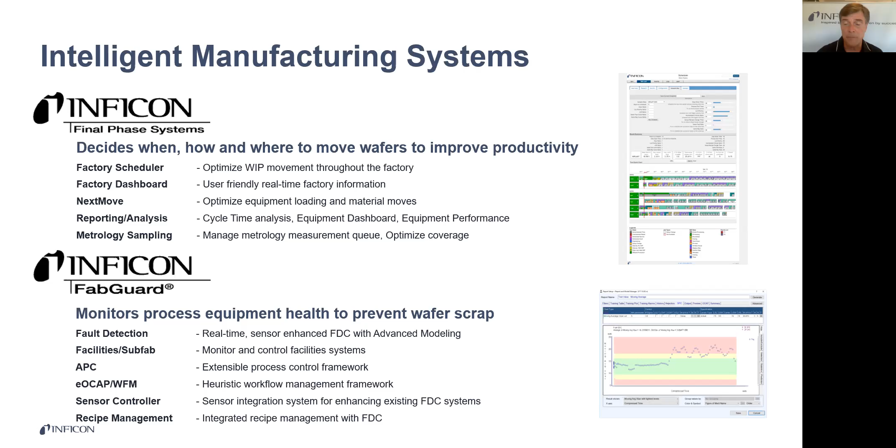INFICON's global presence is reasonable. We're a mid-sized company. We have 1,244 employees. But the most important thing is that we are where semi is. So we're in North America, we're in Europe, and we're in Asia. And there is somebody, boots on the ground, very close to you at all times. And we're very excited about our emphasis in the last 18 months on really increasing our expertise and our centers of excellence in Southeast Asia and in Europe.

Now, pivoting away from who is INFICON, and first of all, I hope you already knew us, I want to talk a little bit: what is all this smart and Industry 4.0 stuff anyways? So, first of all, smart manufacturing is largely the North American, more Asian definition of the same thing as Europe's term Industry 4.0. So the two terms are used very interchangeably now. They came about the same time, but out of two different think tanks relative to the same phenomena. And so I'm going to use those interchangeably.

I tend to use smart more because I'm in North America, and SEMI has used the term smart, and I'm involved with them. But the reality is that consulting groups on both continents came up with roughly the same concept. And so effectively, the first industrial revolution was literally the weave, in 1784, the mechanical weaving loom. So ironically it was almost exactly 100 years later until the first assembly line in 1870. And once again, almost exactly 100 years later for the first PLC, or programmable logic controller.

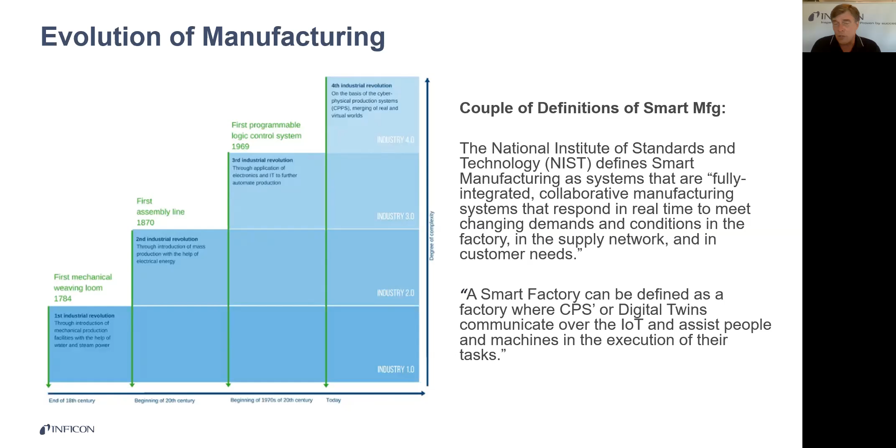Another definition, which I do want to talk a little bit about, is a more recent one that Deloitte put out, another great consulting firm that's working heavily in this space. I'm not going to read the whole thing, but the underlying part is they say smart factories are flexible systems that can self-optimize performance across a broader network of factories, suppliers, and partners, self-adapt to and learn from new conditions in near to real time, and autonomously run entire production processes.

Now, I purposely underlined across a broader network of factory suppliers and partners. I don't want to argue with who wrote this from Deloitte, but my perspective is that's the end state vision. So certainly, eventually, we want to have everything connected from raw material start to system shipped in a box to your end client. Today, we're not there.

And certainly, we use the term smart manufacturing really to refer to any physical operation of which you want to create a digital twin and have the ability to virtually replicate and emulate. And so that's an important distinction, because some people get hung up with, well, we can't do this yet because we don't have the protocol to speak to all 16 of my different factories, or I need this new communication methodology, or I need a new security system. Maybe true for the end vision, not true for just making your particular factory smart.

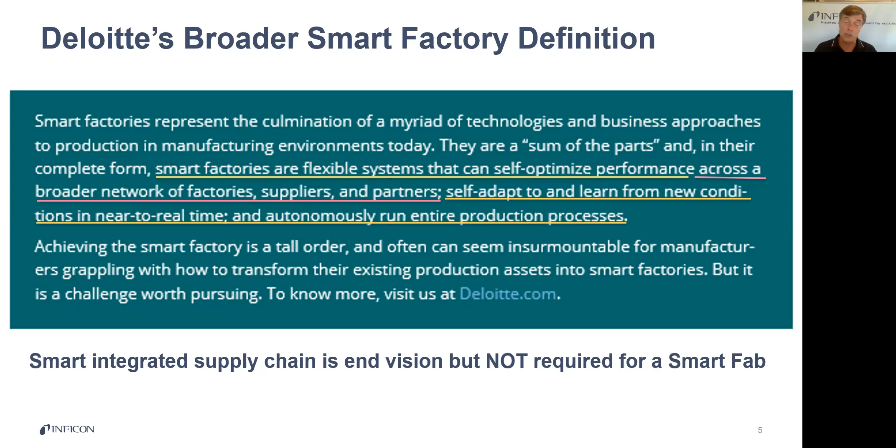Super important point. I'm going to spend a minute on cyber-physical systems and digital twins because they're so critical. People really don't use CPS much, a little bit in Europe still, but CPS was a big word under the Industry 4.0 terminology, where it's a cyber-physical system that they abbreviate CPS. Really, people have just gone to the digital twin, I think, because it's easier to say. I don't know. But they're the same thing.

It's really the situation where you have aggregated and computational elements that have the ability to sense, control, understand the physical and engineering systems, and they're all monitored. All operations are monitored, controlled, coordinated, and integrated to be able to make real-time adjustments with perturbations that are planned or unplanned. Tool goes down, it wasn't supposed to go down. Automatically adjusts, makes the best possible adjustments. Power is lost. What is happening? All of the kinds of things that normally would take human beings, and quite frankly, pretty skilled human beings, should be able to be handled by this digital twin or CPS.

And so it's really critical to understand that it's really a lot of communications, a lot of computation, and a lot of control. Ironically, it was really us in the semiconductor industry, by so dramatically lowering the cost of memory and lowering the cost of computation, that has really created these components that allow us to now have digital twins that can handle the computational requirement of a large modern semiconductor factory.

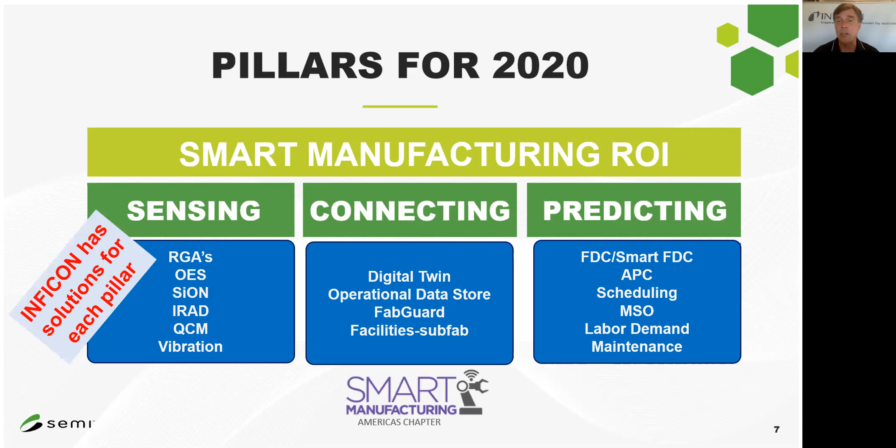So before we do that, I wanted to come back to digital twin a little bit as it pertains to semi. So a couple of points here. One, a lot of people who've been running fabs for 25 years, 30 years, like I have, it's like, well, we already have all this data. We have all these databases. I have this great YMS system. I have all these different systems, this great MES. Why would I need a digital twin?

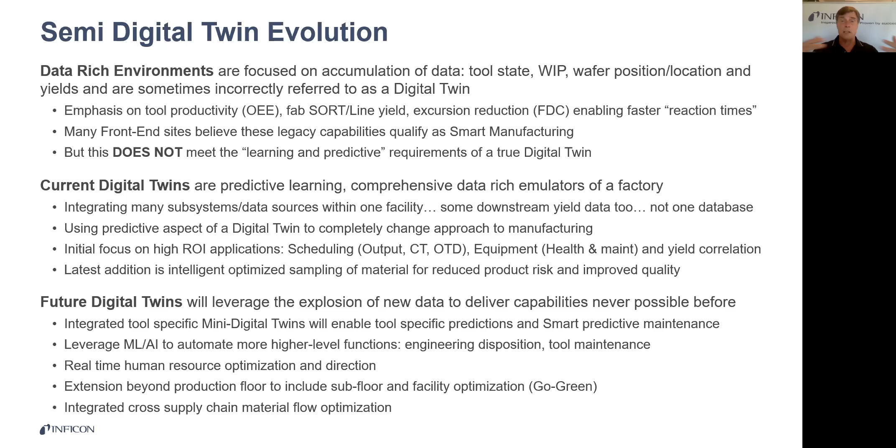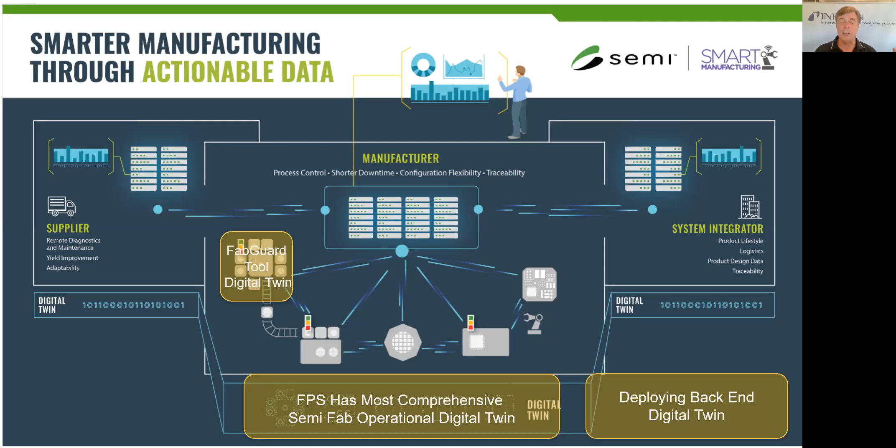And eventually, of course, then you connect the front end to the back end such that we can real time modulate the demand and speed at which we're moving material through the later stages of the front end in order to keep the back end flowing well. And that's where I see the first really next step of this integration as we go towards the path of an integrated holistic digital twin across the entire supply chain.

Let's look in the attic where the abatement systems are, such that all of these systems can be connected to the digital twin and monitored and controlled so that if you don't need a tool for as little as an hour and a half, it's not going to be required by the scheduler. Put it in green mode, save the energy, save the consumption of consumables, be it an abatement gas of some type. So all of that is coming. It's coming very quickly. It's pretty exciting.

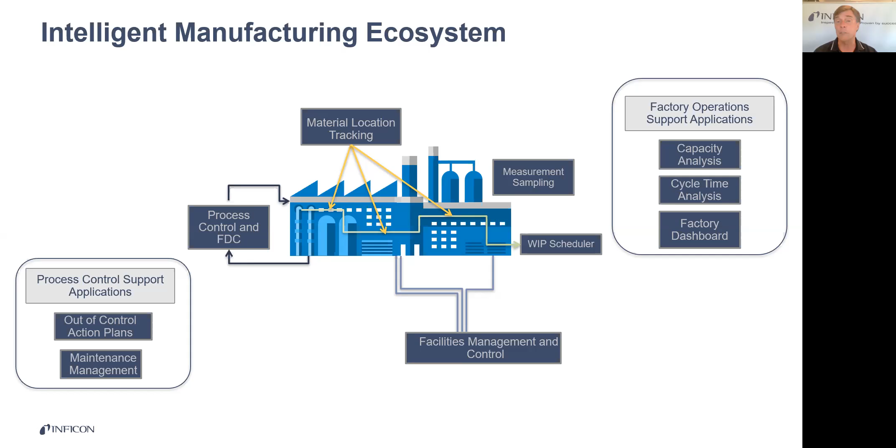And this is just meant to try to put a little bit of graphic here. It's kind of an architectural view, somewhat INFICON centric, but not too much. The middle is your factory. So it could be a little different if you're an older 200 millimeter factory, you've got carts, so you have people, you might have a barcode reader. If you're a very modern 300 millimeter factory, everything's direct load, directly to the tool, so you don't have operators or carts. In general, you still have WIP movement, okay?

You need to know where the WIP is, and you need to move it from point A to B in the appropriate sequence, etc. And you still have an MES, everybody has an RMS, SPC, etc. So these middle sections everybody has, they just look and feel a little different depending upon your size and really candidly the age of your factory. So the beauty of the INFICON solutions is they're agnostic to all of those systems. We've connected to more than 13 different MES systems.

And so the digital twin on the left-hand side, which is part of the FPS solution, runs all of its applications. And then it is connected to the executive and the FabGuard IPM systems that manage the tool health. And they're all connected. So the most important thing is, it doesn't matter how old your MES is or what type it is, we'll connect to it and turn it basically, sorry, how does that go? A sow's ear into a silk purse, I think is the saying.

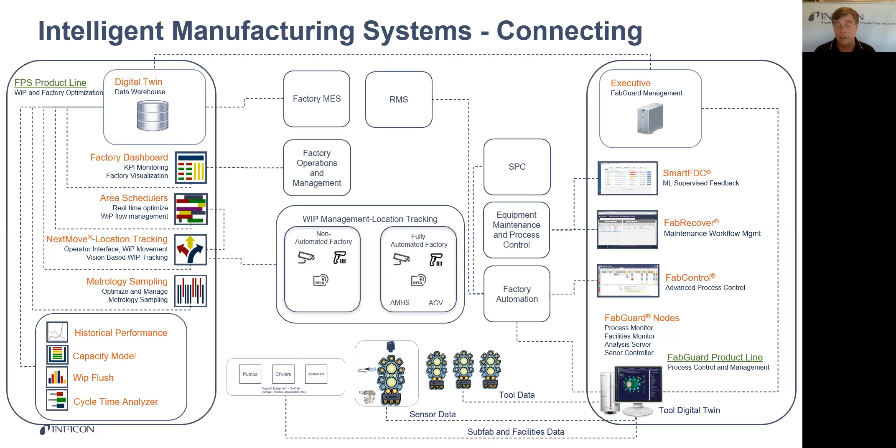And that way we'll end up taking your old system and turn it into a brand new looking system through the front end GUI of our dashboards and other applications. We've done that many times. It's a very successful model. Which kind of brings me to this little side conversation here. A lot of interesting solution provider hype about smart, and any of you who own fabs or run fabs are getting hit left and right from everybody.

I can only say that getting a new MES does not make you a smart fab. You may need a new MES. You may not. Certainly, the older MESs, the PROMIS, the Workstream, etc. We have many clients that use them, and they work great. Particularly if you add a smart layer on top of it, such that the custom stuff you had built previously largely gets taken over.

And so, you may have a reason where you just feel like you have to get a new MES. But in general, our experience has been that you're far better off just putting a smart layer on top of your MES, so it can do all the heavy lifting, the smart integration, because MES, even if you go get a new one, it takes you a couple of years and millions of dollars, and it still won't be smart. And you've lost 2 years typically in the timeline to getting the ROI, which is really going to become very critical from the point of view of competitiveness.

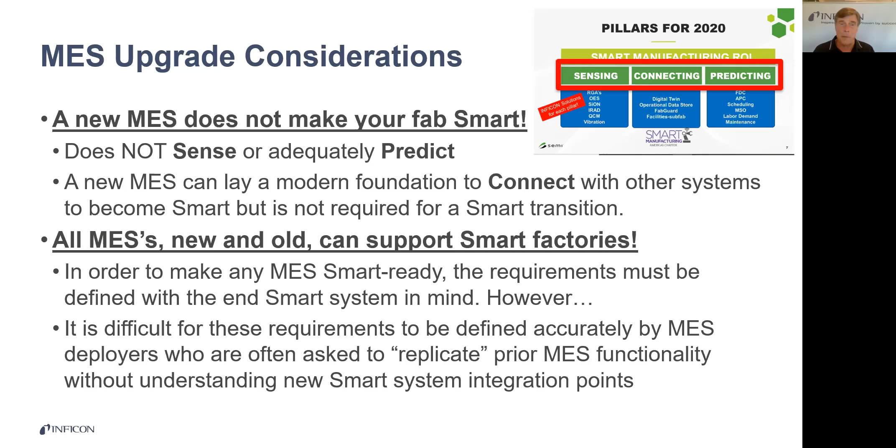So basically, our attitude is any MES can support smart deployment. And then our other comment would be that if you really do need an MES, then we should talk, because many people we see deploy a new MES trying to emulate or copy their old MES, but in a new structure, and then it's not very well suited structurally to integrate with a smart digital twin. We've come into factories that have just completed conversions to new MESs, and we've had to almost start over and redo the MES setup and installation, because it wasn't configured in a manner appropriate for the requirements of a digital twin.

So in general, our attitude is do a digital twin. It's certainly not hard for us and most really good digital twins to go to another MES as a data source if in the future you felt you needed another MES. But the point is understand the structure and the requirements. And you can read this later because this is downloadable, but these are our discussion points.

Quickly, I just wanted to point out the FPS product line. We have the digital twin dashboard, which is basically the incredibly complicated and powerful visualization tool, real-time drill down, and factory scheduling. We have NextMove, which is important because scheduling is great, but if you don't have the ability to go from this generated schedule and translate and connect to your AMHS system, your robots on the floor, your carts, your operators, to ensure that the directions the digital twin and the scheduler have created through its optimization algorithms are followed, you won't get the ROI. So that's a whole application that we have. I think we're the only ones with that, but it's important.

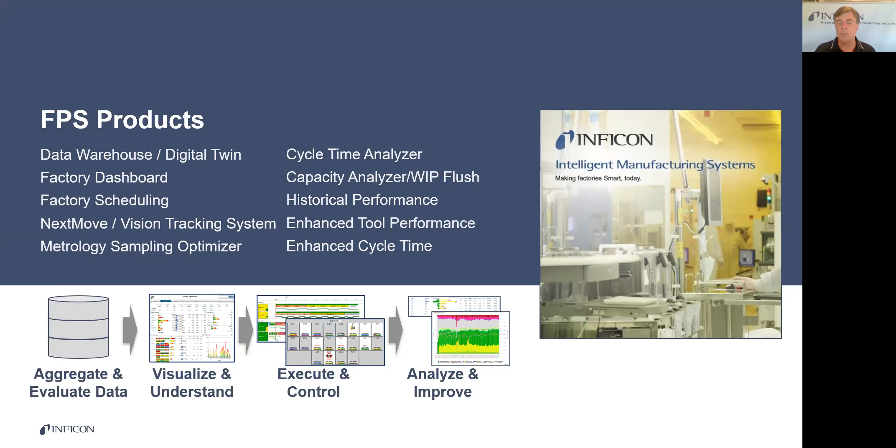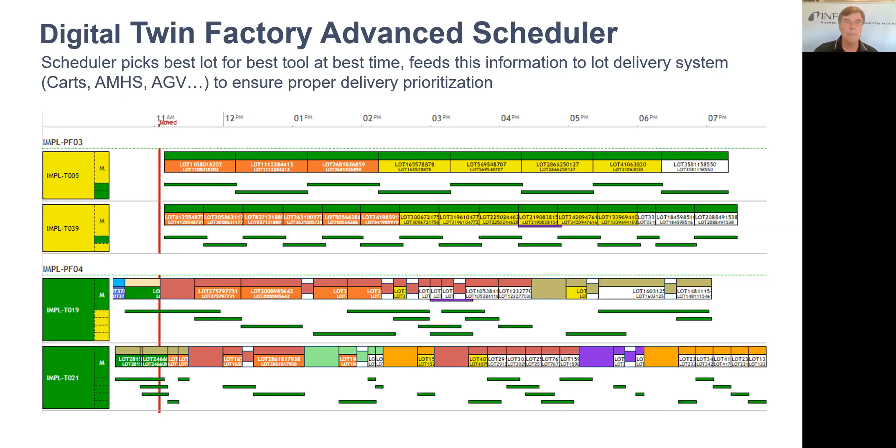MSO I talked about earlier, and we have a whole slew of analysis tools, because when you have all this data, you can do some deep dive analysis to determine where your opportunities are. I felt obliged to at least show you a scheduler. It's a very simple version, but it's an example. If you want to see more, please go see or download Matt's talk. It's very good.

And then FabGuard is our sister group. They have FDC, Fab Recover, Fab Control. In the area of fault detection and classification, we have FabGuard deploying machine learning and artificial intelligence to make what we refer to as smart FDC, to reduce the labor burden of establishing the rules and setup associated with creating an FDC system. I'm pretty excited about that.

Fab Recover is one of our newer thrusts this year. We've worked with a couple partners in the semi industry. This is going beyond FDC: okay, I've done a maintenance event. Did it work? Did it not work? What part of it worked? How do I create this over time into a virtual BKM, such that, particularly in our industry, as some of the greatest maintenance technicians are retiring soon, we have a digital repository of their expertise and can help first-time success?

So this is an exciting product. Last slide, and I promised you that I would talk a little bit about COVID-19 and its impact on generally fabs and smart deployments, and I guess more broadly, I would just say worldwide manufacturing.